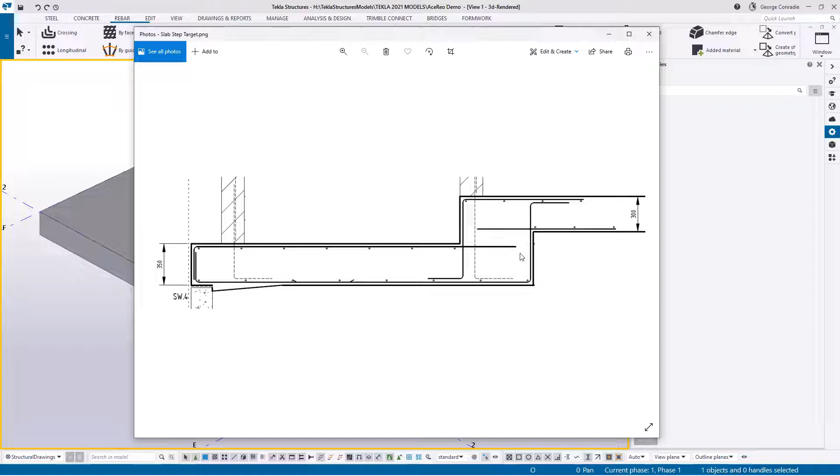Now, if you look at this, you'll see that the rebar just sort of ends here. And this is typical of a slab that's post-tensioned. So in this area and further beyond, there most likely won't be any reinforcement apart from reinforcement over columns and perimeter reinforcement, because the post-tensioning will deal with the rest. But this is a very typical slab arrangement in Australia. So let's see how we detail this arrangement.

Also in the model, you'll see that I've got two examples here. They are modeled differently in terms of concrete. This is typically what we find with IFC imports, where you have a slab modeled in the bottom, you've got a slab on the top, and they've joined the two together with a full depth slab to stitch them together. So there's an overlap here and there's an overlap there, and we'll just see how we deal with that. This one, however, has got a slab in the bottom, a slab in the top, and it's stitched together with just a small little piece of insert, so there's no overlapping on this one.

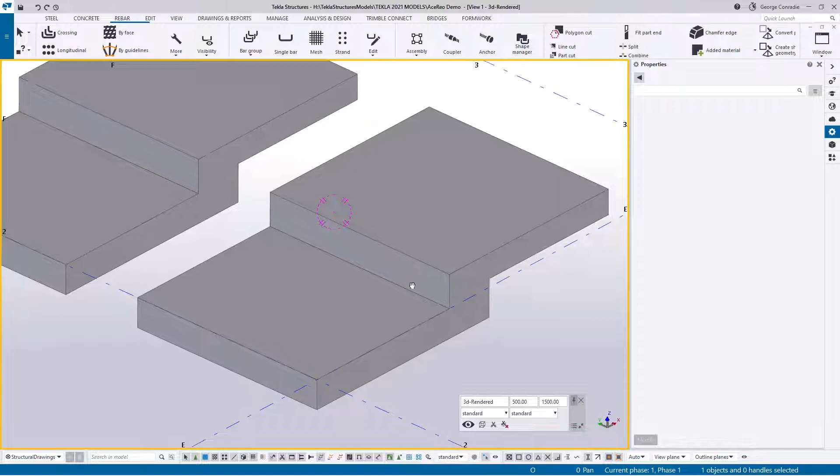Pretty much the same outcome in terms of reinforcement, but I'm going to use this one to show an alternative to Z bars where you have full reinforcement on the slab. Let's just start out. I'll go transparency mode, I'll go Control P, and I'm going to isolate this so we don't see the other one. So if I select that, right click, select in selected view, so we'll only see this one now.

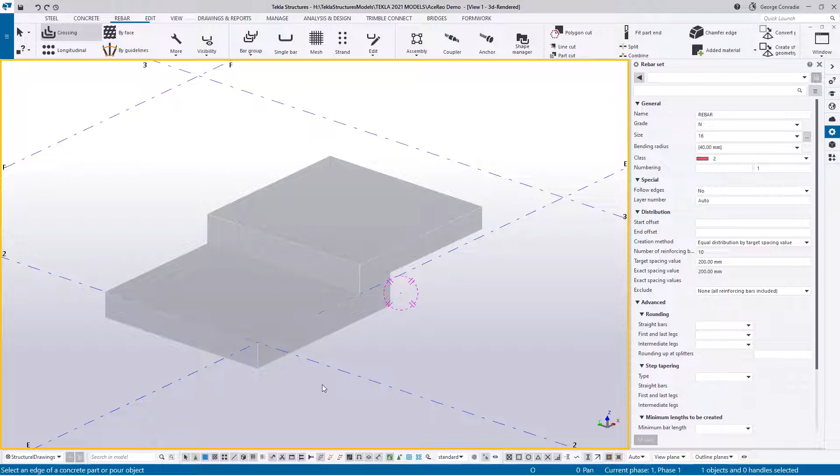And then as tradition has it, we've got 16s at 200, so I'll go and select my 16 mains. I'll keep my main layer reinforcement, I'll keep red, and then for the offsets nothing, and for the target spacing 200, all of that is okay. And then I'll hover over this part of the slab, and instead of selecting all of it, I'm just going to select the front part and the bottom part for the rebar, and I'm going to say okay.

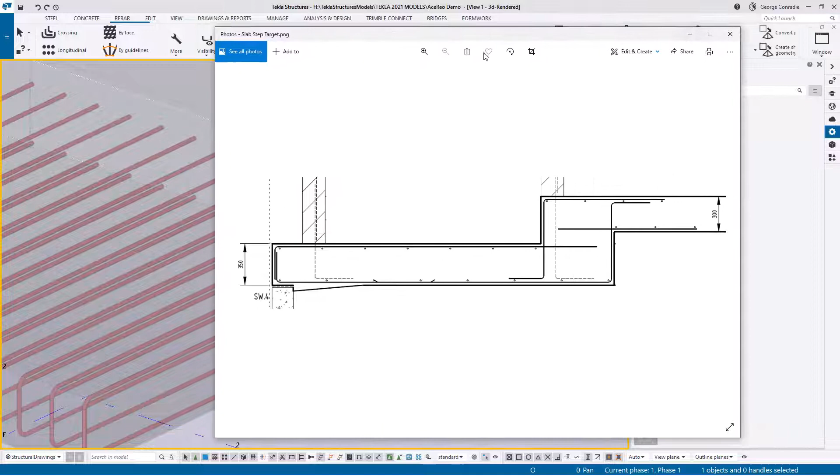Now, before we move on to the top part, we're going to finish off this bar. If I just drag my view in here, we want to deal with this bottom bar. So it's got a hook at this end coming around here. It's split, it's got a splitter here, and the reason why they put a splitter here is just to give the guy some adjustment on site. If you have a snug fit there and somehow the formwork or the dimensions on site change, and you've scheduled it without giving a bit of grace here in terms of a lap, they might run into problems.

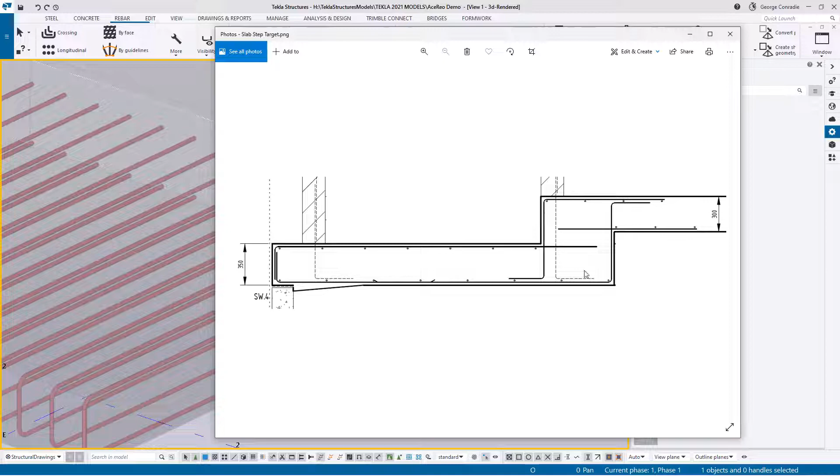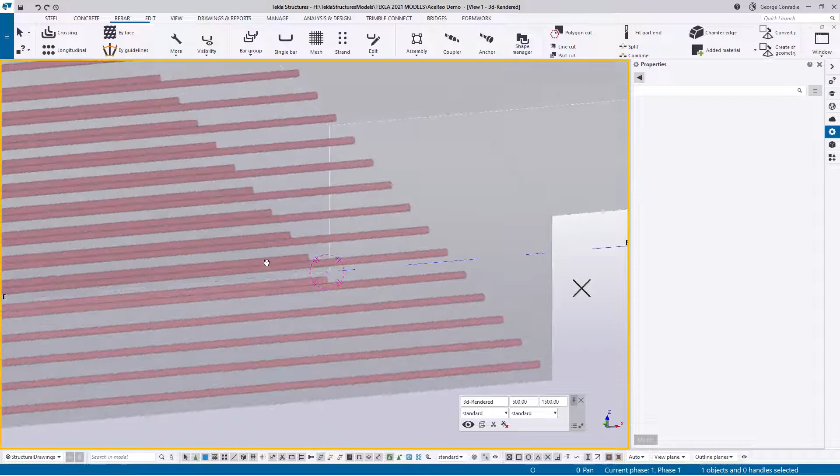And then this one that's split goes up all the way. It's one bar to the top of another slab. So let's do that first. The first thing I'm going to do is make sure that my leg visibilities are on. And then I'm going to click on the top part, hover over this edge and just drag that down. The reason why I'm dragging it down to the concrete is that once we have that at the concrete's edge, we've got control of how much we want to insert.

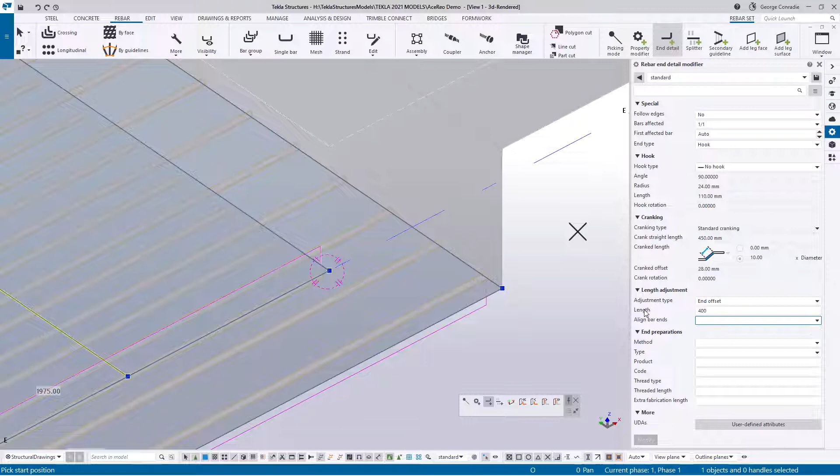Now there's two ways. Click on this, extend that by the exact amount you want, but then if that changes, you have to come back and stretch again. Or the way that I prefer to do it is I select the bar, go up to our end detail, make sure that we've loaded any defaults. Then for the hook type, I select no hook. And for the adjustment type, I'll say give us an offset, and the offset we want is 400 millimeters. Now, if we hover over this end, we can see we have an extension of exactly 400. Should this now change, we don't have to fiddle with the face.

All we have to do is just click the modifier, and we can change anything here. We can even introduce hooks or whatever we want in here. We can also affect every second. There's a lot of stuff we can do with that, but I think that's the better way of detailing if you want to cater for change management.

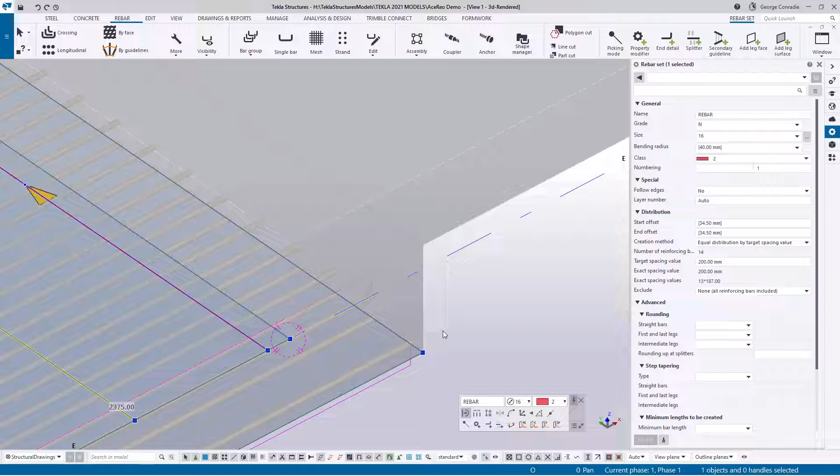The next thing we're going to deal with is this bar. Now, according to our sketch, this bar should go up this wall and up to the top of that slab. So the quick way of doing this is you can say add a leg and then swing around and add this face and then do all kinds of stuff. But the quick way to do it is you click on this bar, you hold in your control key, you select that leg and you drag it up.

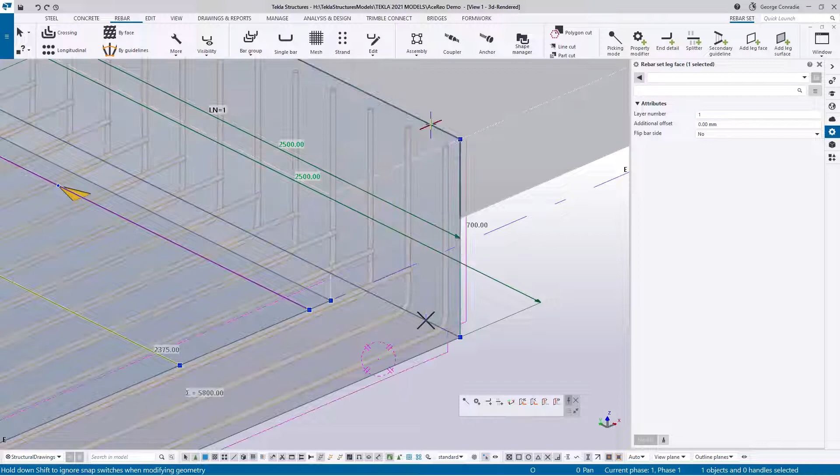If you control drag up and we drag up to 750, because that's the difference between the two, it creates a leg instantly for you. And now you can repeat that process again. You can just hold in your control key, click on that face and then drag it, say for instance 900 mils. And just like that, we've now created that Z bar that the sketch showed.

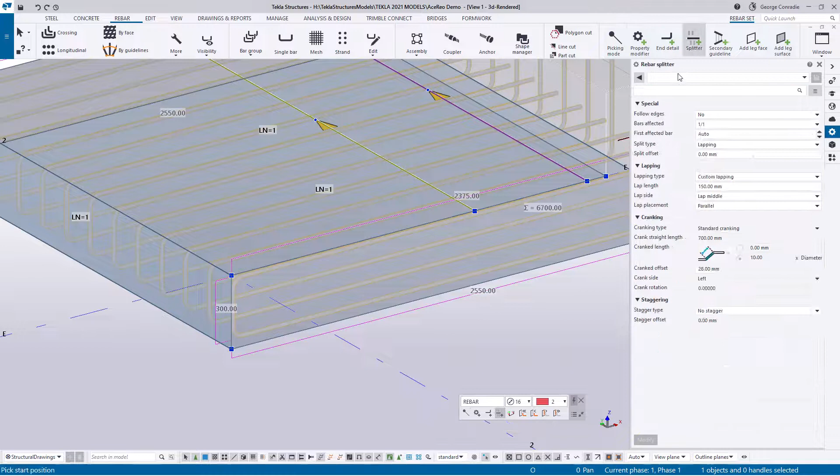Now the first thing we need to do is we need to split these bars here because they've got a hook on the top and a hook at the bottom. Let's just have a look at our sketch. So it's these little hooks here. So let's deal with that first. So if we click on this bar and we say give us a splitter, and I'll just load my defaults, see what happens, and I go in the middle of this face and I split it.

You see how everything wraps around, and what it's trying to do is build up 350 millimeters each side, because when you click on this, we have a 700 lap divided by 2 is 350. That's not what we want. What we want is a custom lap, and I'm just going to chuck in there 100 millimeters. And now if we look at that and we see these values popping up on the screen, it's 200. That's a typical 200 lap that you would expect in a 16 millimeter bar.

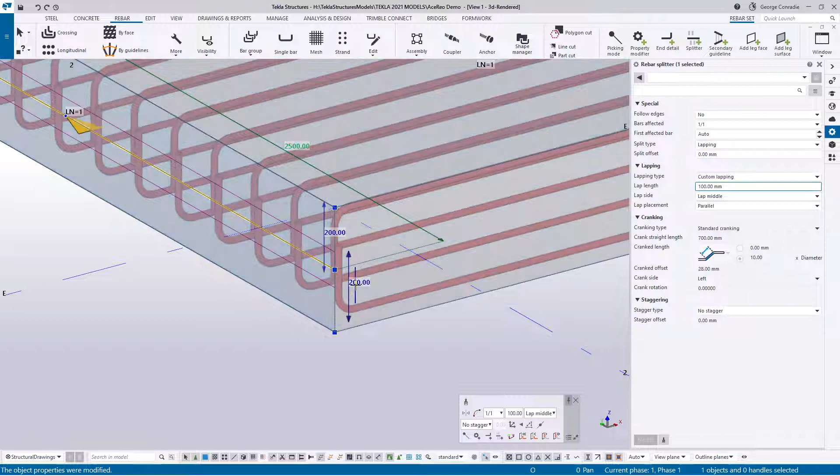Where does the 200 come from? Well, a 16 bar's actual diameter is 19, and a typical hook standard would be 10 times the bar diameter of 19, which is 190 millimeters. So we round it up to 200 mils. So that's really what we want to achieve. So instead of having a splitter to lap something, we have a splitter to generate a hook.

Now, this is just a quick way of doing it, and the reason why I do it like that is we don't have to deal with clashes. In the form of a splitter, Tekla's just taking care of that for us. And now we can move on. The next thing that the sketch wants is there's a splitter down the bottom here to separate this little L bar from this little Z bar, or big Z bar, long Z bar.

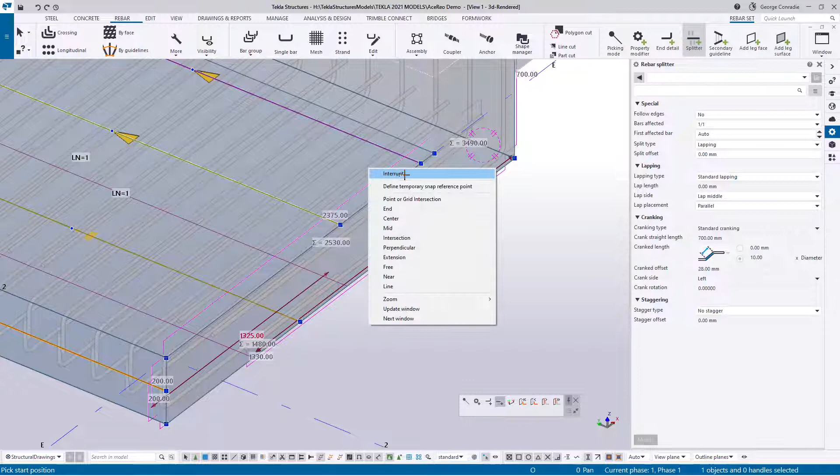So what we can do is click at it once again, go to the splitter. This time we have to reset our settings. So we load our standard, so we're back to a standard bar. Now normally these dimensions will be indicated on an engineer drawing for you, but I'm just going to wing it. I'm just going to say 1000 millimeter. And once I do that, maybe what I'll do is I'll just go group bars so we can just get a better picture.

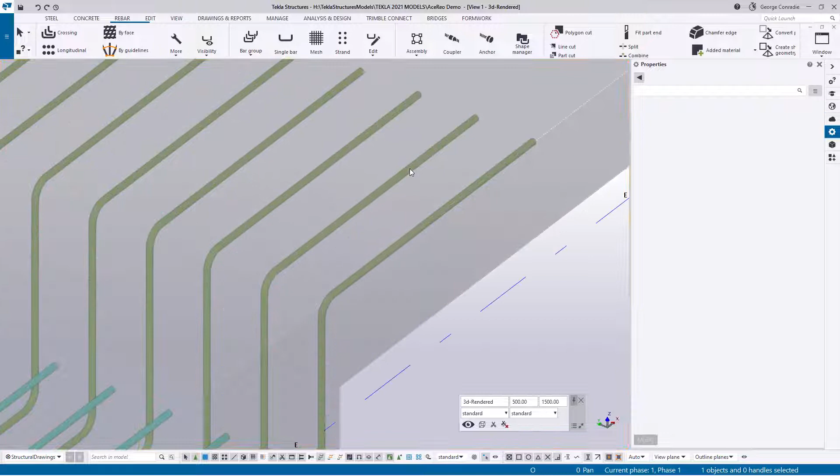Now we have this blue bar that wraps around, that's the 1L. We've got this cyan bar on the top that extends into the beam. And then the third one, this green bar, is now the Z bar we want. Now, if I click on this bar, we can see that the length of this leg, although we stretched it 900 millimeters, it's giving us a leg of 944. The reason for that is because of the cover. You can see it's extending to the back of this.

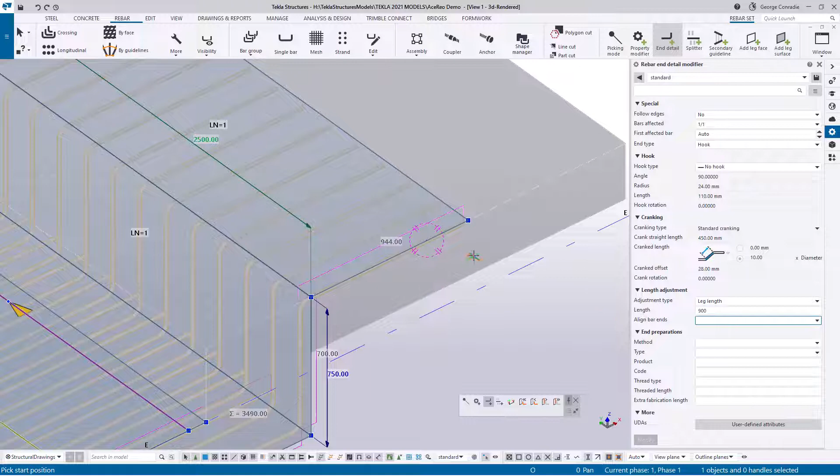And if we want that leg to be exactly 900, which is what I want, then what we can do is go over to the end detail modifier, reset our standards, and then for the hook type, again, we're going to say we don't want a hook. But for the adjustment type, we're going to say we want the leg length, and the leg length we want is 900. And once we do this and hover over that, Tekla then fixes that to a 900 leg. So you can see we've got a 900 leg there, and that bar is exactly as intended now.

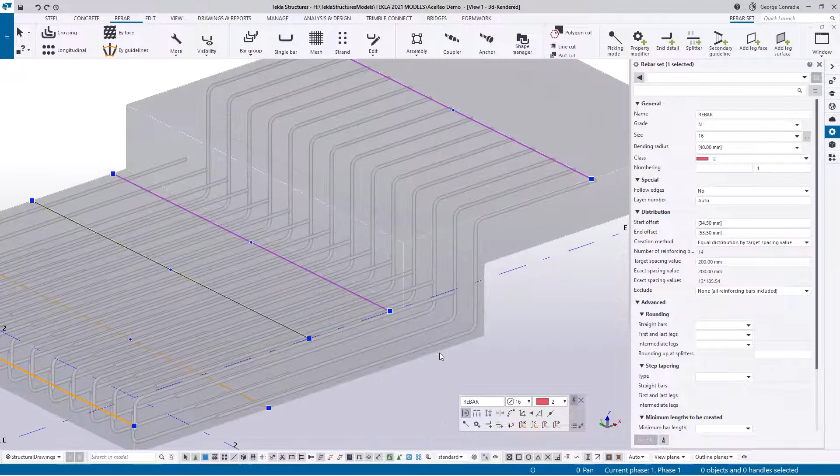So we've pretty much dealt with all of that in one set. If I click on that, that's still one set of bars, and I'll switch off the visibility so it's a bit more clear what's going on. If we look at that now and click on that bar, that's one set. So we've managed to get 3 bars: the L on top, the L at the bottom, and then there's a long Z out of one set. And we didn't have to worry about spacing.

So what I'm going to do now is go Control P to see a plan. Then on the top, I'm going to click on the spacing bar and say Modify Settings, just to see what we've got here. Now we've got our minimum calculated cover there, and we've got the maximum amount of bars fit in. So what I'm going to do is change it.

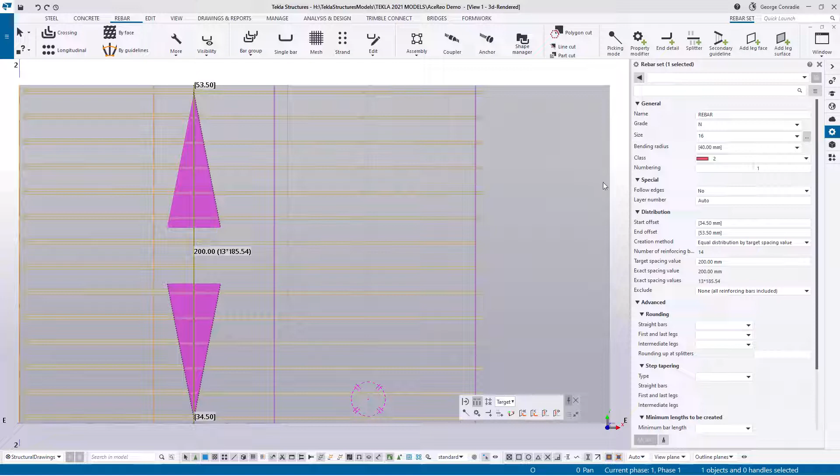I'm going to say I want an offset of 50 at the bottom, and I also want an offset of 50 on the top. Once I do that, oh, that's very coincidental, but it's very nice for us. Tekla has now come up with 12 spaces at 200, which is 13 bars exactly.

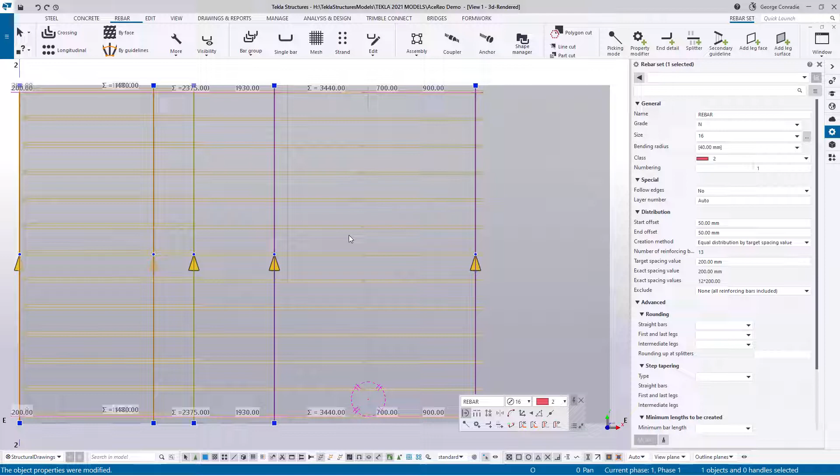Now, the reason why I always do that, and I know I repeat myself in these videos, but it's very important. Once you arrive at the drawing, you're not going to wonder why you get strange target spacings. These spacings are exact, and it's always better to give them a bit of grace off the cover. You don't have to go all the way down to the cover, the cover is a minimum setting, not a maximum. So when the bars in the other direction fold around, you don't have to worry about whether they'll interfere with the rounding of the bar. So it's good practice to do this.

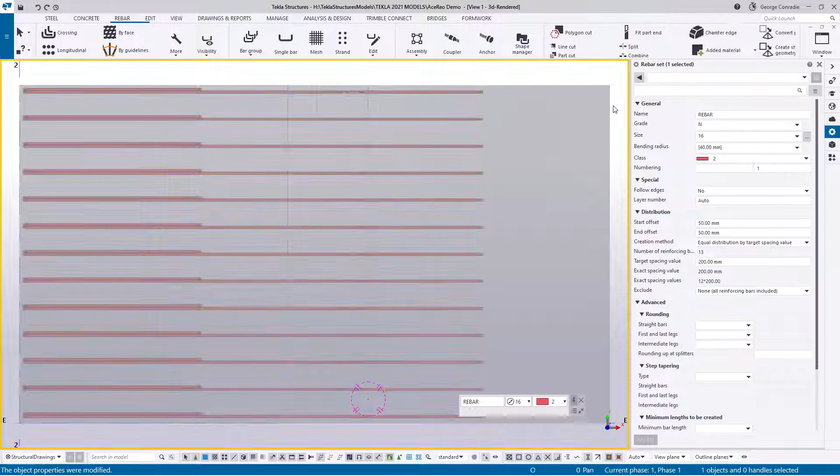So the next thing we want to do is deal with the other bars. If I just go into 3D again, let's have a look at the sketch. I think the next thing we need to do is just deal with this little straight bar here at the bottom. Now, there are a lot of ways to deal with this.

The easiest way I would imagine is to go Control P and then hit this by surface or by face, and we still have the same settings here. Then what we need to do is work on the bottom of the slab, so we want to work on the far face, and then we'll see what comes up here.

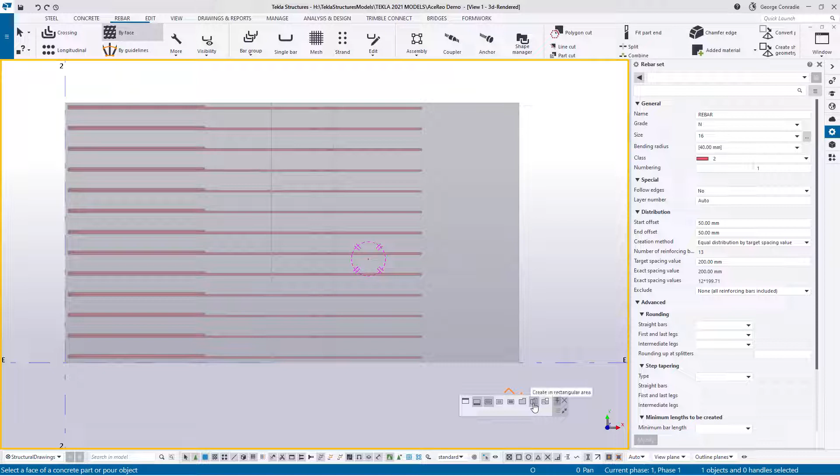But what I also want to do is work with a rectangular area. If we pick this bottom corner and pull it across to there somewhere, we can see the direction of the Cyan line, so that's the wrong orientation. So what we do is click this one, and now if we go here, we've got the right orientation.

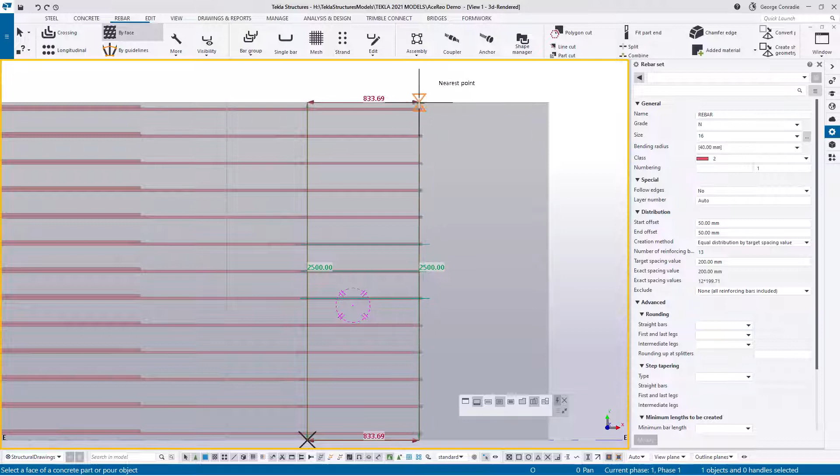Now in terms of the size, if you get funny dimensions, you can hold your shift key and just start panning. You'll see that it will eventually get you the dimension you want. In this case, we can just deal with it, and if it doesn't accept, like there I clicked, oh, and it did accept it because exactly, oh yeah, it's exactly under the other because we accept the same dimension.

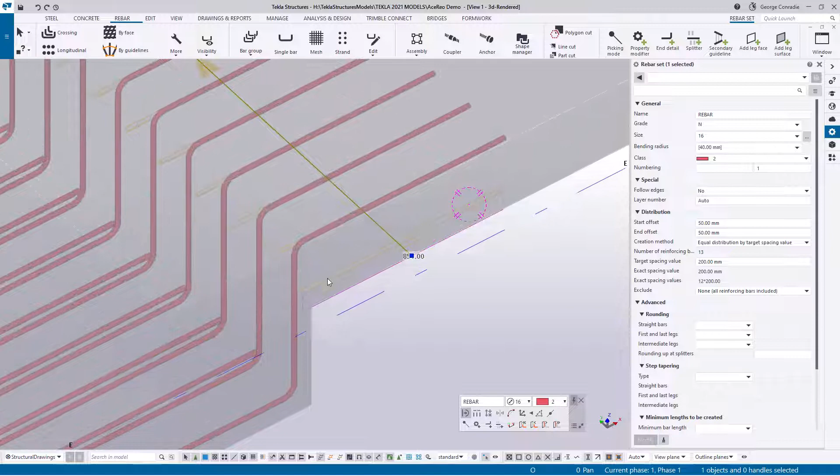So once we've got that clicked and in place, if we just look at the leg face again, we can see it ended at the concrete. So now we're going to control the amount of projection into the beam with an end modifier, and this time it's no hook, and the length is not a length, it's an offset, and we're going to be offsetting this 400 like we did before. Then if I click over here, that will extend it into the beam for us.

Now if we just click on that and look at the bar length, it's not lighting up at the moment, but we can always do an inquiry. You can see it's 1250, and well, actually it says it there. So I think in this regard it actually works out quite well. I think we've been a bit lucky there.

So if I go into Control P mode and click on that bar we've just put in, it's obviously clashing at this intersection. So there's a really quick fix for this.

Now remember these bars, if I just click on those again, these bars happen to be 12 at 200 exactly, and the target spacing of 200, 50, 50. So that worked out nice.

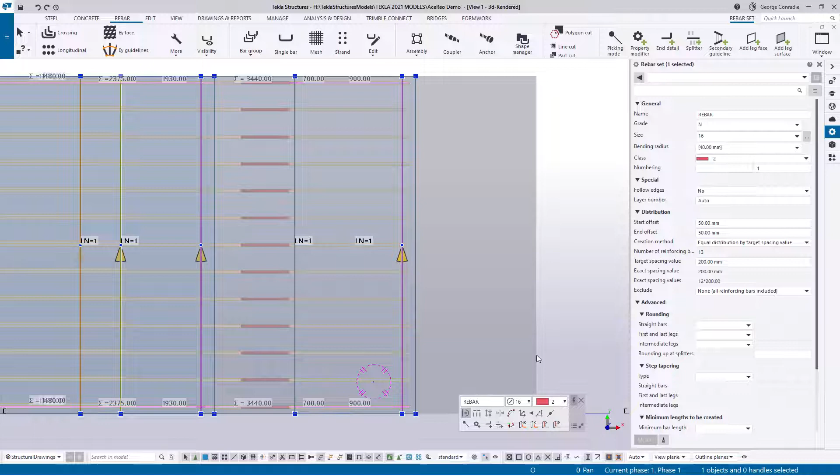So to fix these up, first we know that from the center to the end is 50 millimeters, so we need to move this bar one on. 50 plus 19 gives us 69. We need to look at the direction, the direction arrow is here, so this is the start. So we want to change the start to 69.

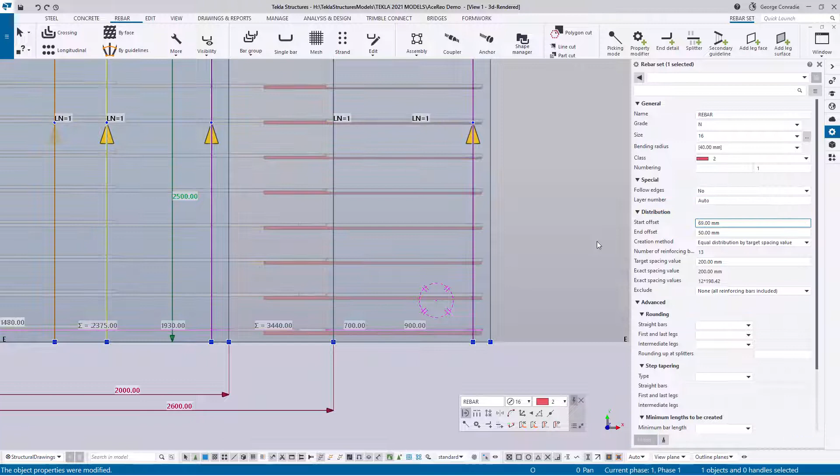As soon as we do that, we can see I moved the wrong bar. So let's just undo that and pick the right bar and do the start at 69. That moves the bar exactly off edge.

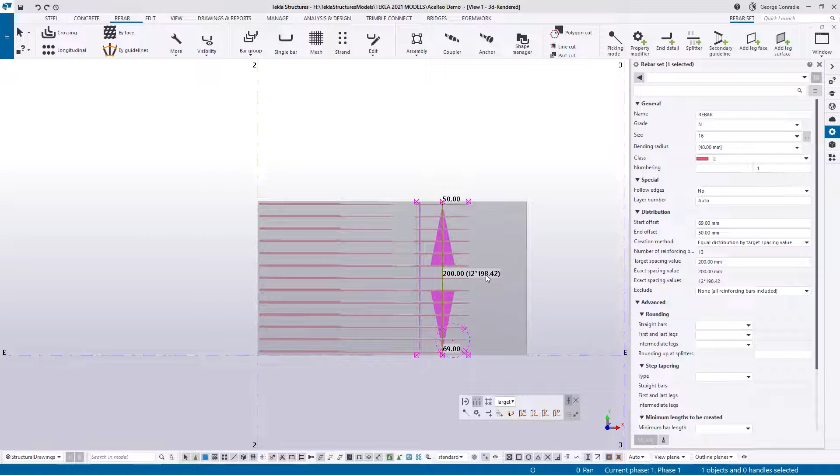Now if I click on the control line here and show the dimensions, you'll see we've got 69 here, but we end up with a bad dimension there again. So we can just say give us a flexible last space, modify, and that will fix that up. Then all we need to do is at this end here also add the 69 to the end.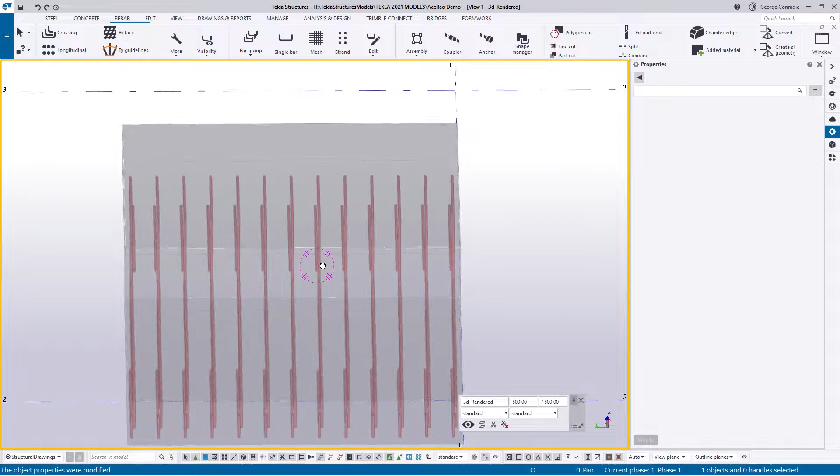And just like that, we now have a clash-free crossing there. Your drawings will be good because all these bars will be at 200 millimeters spacing except for the last bay.

Now that we've got that, the last bar we need to look at is this Z bar over here. The way I'm going to do this is I'll use, well, we can use bar by face or crossing bar. I think let's use the crossing bar for this.

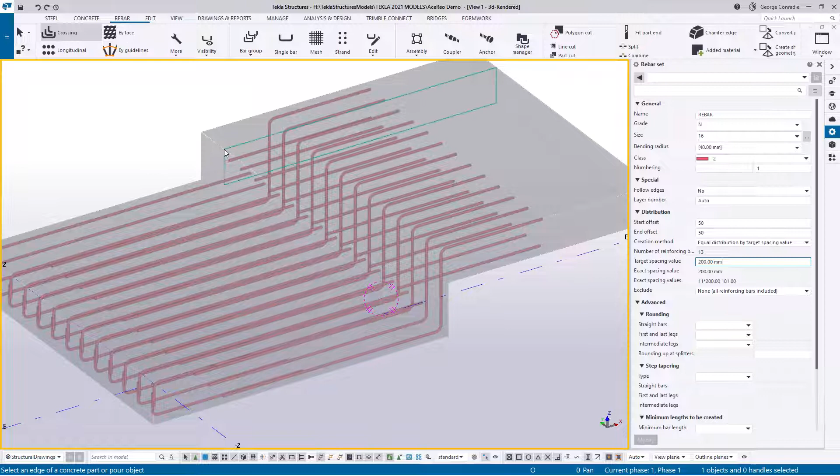What I'm going to do here is go back to our 50, and everything else remains the same. I'll also just go target 200. What I'll do is hover over this, but only select this vertical face here, and then say okay. So we get these little stubbies at the end here.

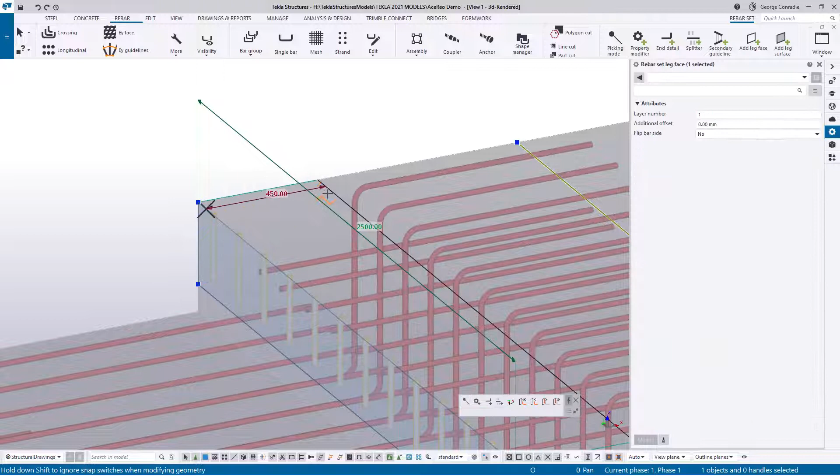So the quick fix to turn that into a Z again is if you click on this bar, we get our face. Then again, holding your control key, click and drag this, and let's call it 900 mils. That'll give us a leg on the top here.

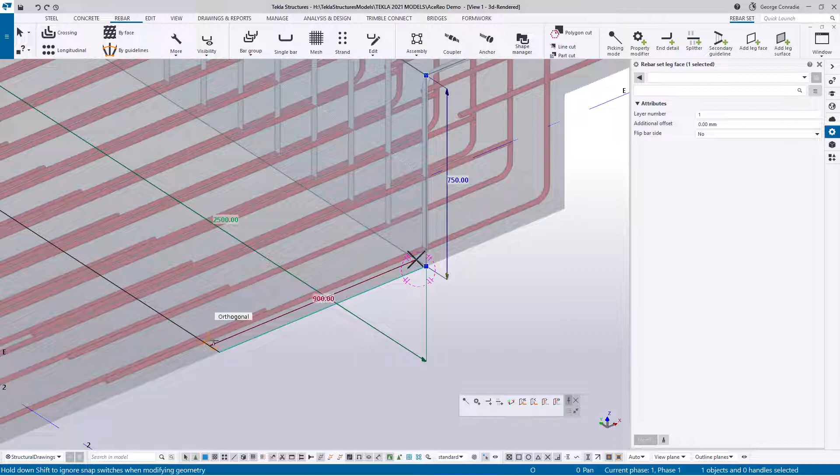This bottom one, if we hover over the edge here, we can take this arrow that will keep it ortho to the bottom, and that extends that. Then once we're at the bottom again, we can take our control key and drag this leg to 900. And just like that, we've now created a Z bar in place.

So what we need to do now is just look at the spacing and the leg lengths. I'll click on this bar to make sure we've got the right bar selected. I'll switch off my visibility, then go Control P to see it from the top, and we can look at our leg spaces quickly.

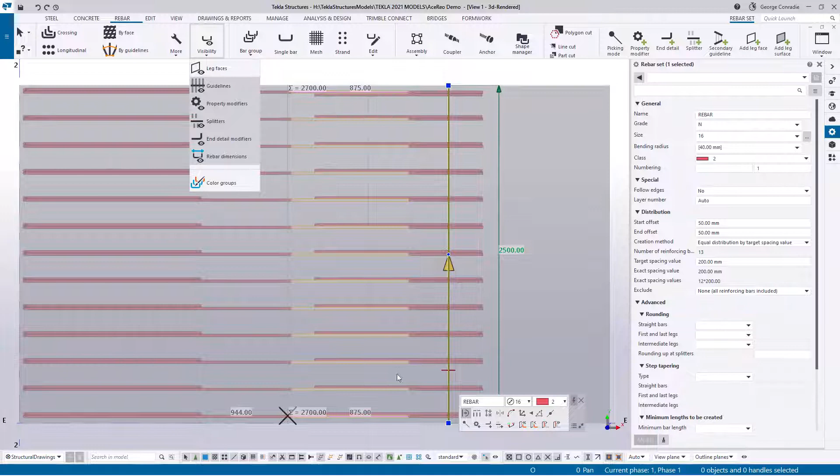So this bar needs to move, it's clashing. Let's just see where it's clashing - it's obviously clashing with that one, so it can move one across and it's going to miss that one. So if we move this bar one across we should be good. One across means 69 to this value, so that moves it across.

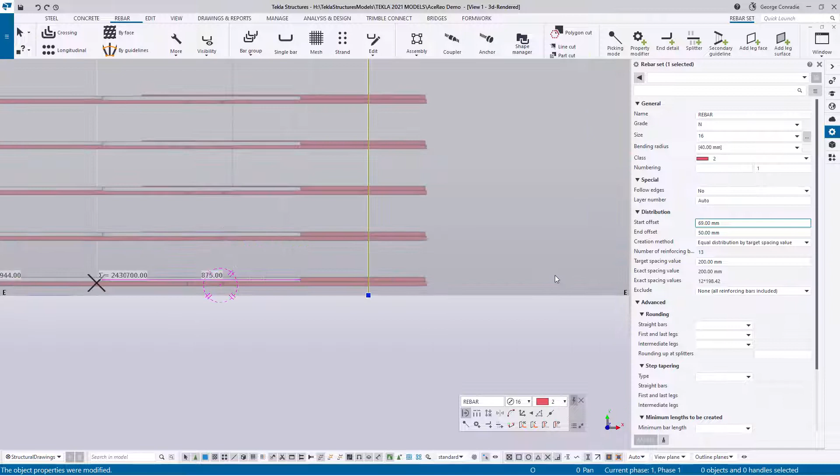In terms of the spacing, you can see here from 12 at 198, the spacing is a bit crooked again. So if we click that and say give us a flexible last space, modify, that fixes up all the spacing for us. Now the last bar, you can see we've got that clashing again, so all we do is increase the cover there to 69. That should be it.

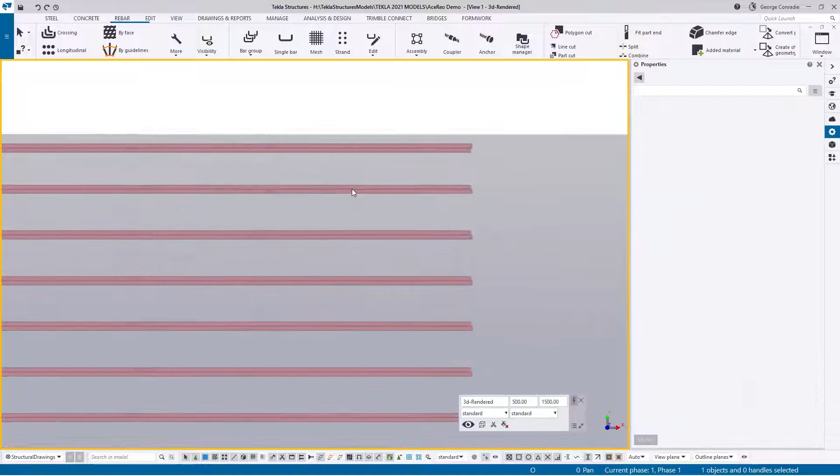Let me just see if I can rotate here. There we go. That should now have all the bars in the main direction clash free, working with each other, and we've got our Z.

Now the only thing we need to do is we've got a problem here, you can see there. So first we're just going to deal with the legs of these bars. For this one, in the bottom it only needs a leg to stand on, so we can say give us a leg length this time, a leg length of say 600, and no hook. Then if you hover over that bar, it will pull it back.

So you can see we've now dealt with that problem. And on the top, the leg can be the same as with the other bar, which is 900.

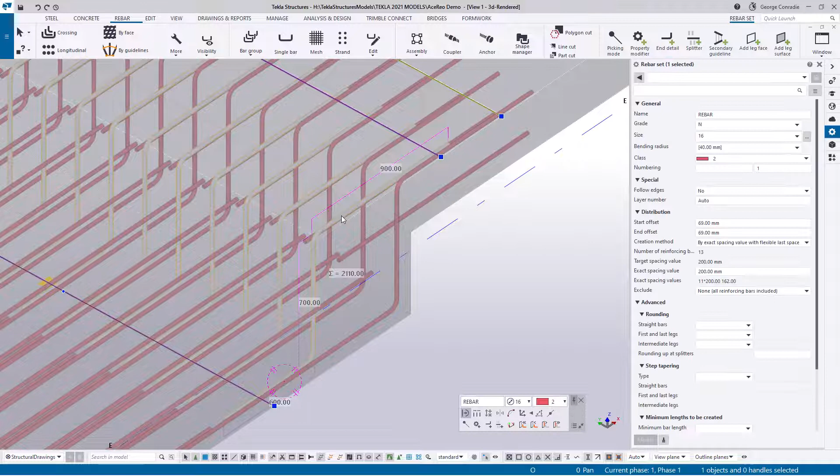So again, in modifier, we want a leg length, and this time 900. We can just hover over this edge, and that turns that Z into a 900 by 600 by whatever the vertical is, which is 700. If we go inquire, we can see 900, 700, 600, beautiful dimensions, and also clash free at this stage.

So the only thing that we need to do to finish this up is our distribution. Now that's the easiest part of the lot. So if we go longitudinal, and we'll pick a different color for this, green, and I'll get rid of the offset so Tekla doesn't auto calc. We'll go at target spacing, and let's make this, because the distribution is still just 300, make them a bit bigger.

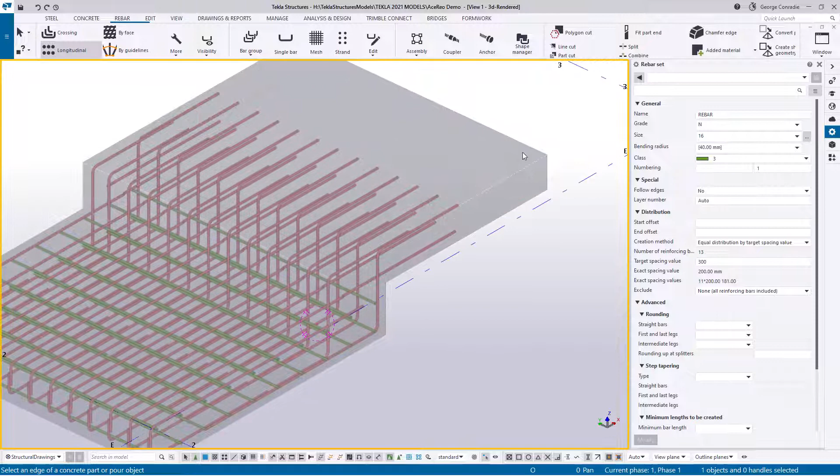And then what we'll do is we'll hover over this edge, and then we'll pick the bottom, but we'll also pick the top, and that takes care of that. And at this one, what we can do is we can pick the top and the bottom as well, and we'll have to trim those down a little bit.

And we can say, oh, let's do this one differently. I'll escape there, I'll show you a different way to do it. But let's just look at what we've put in here. We can see that's worked out quite nicely, except for the top. It's going too far, that bar is loose.

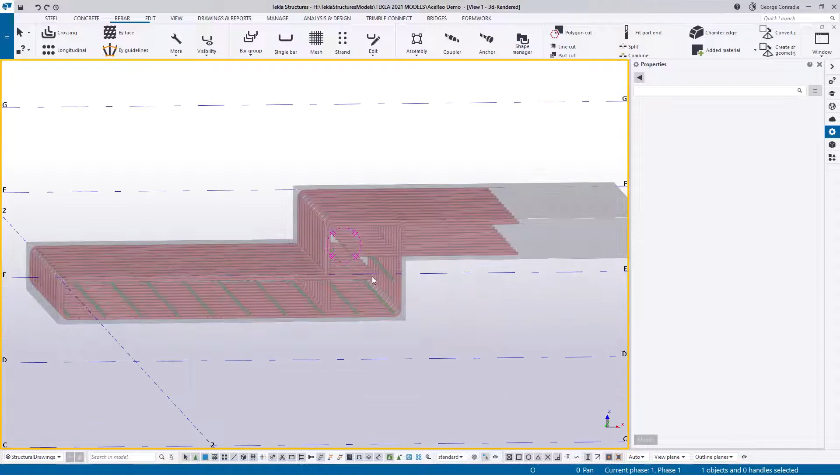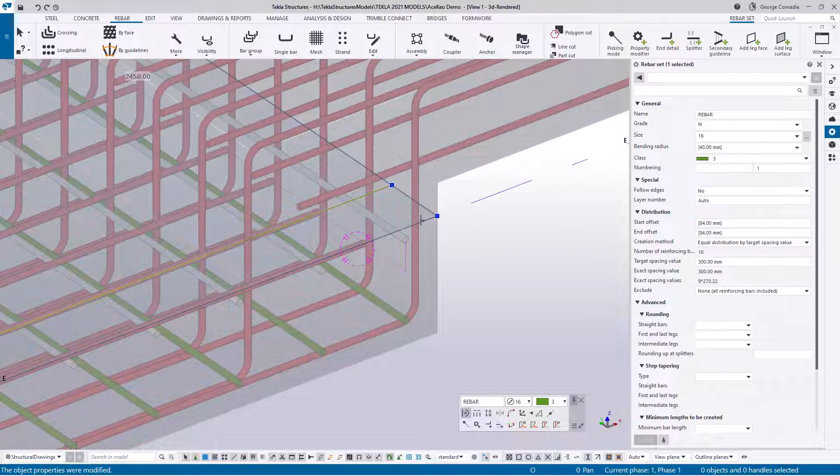So there's two things you can do here. The one thing is you can click on this bar and say omit the last bar, and that problem goes away. The other option, if you don't do that, is to switch on your leg visibility again, and then bring this leg back to the end of this bar, and that gives you the same sort of result.

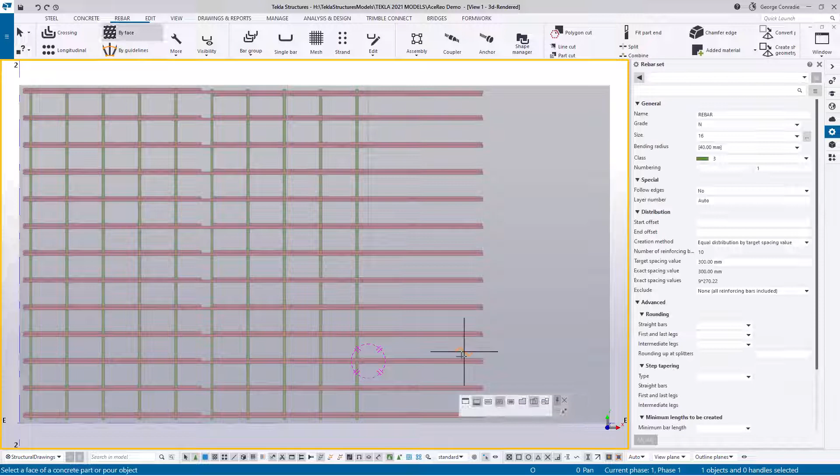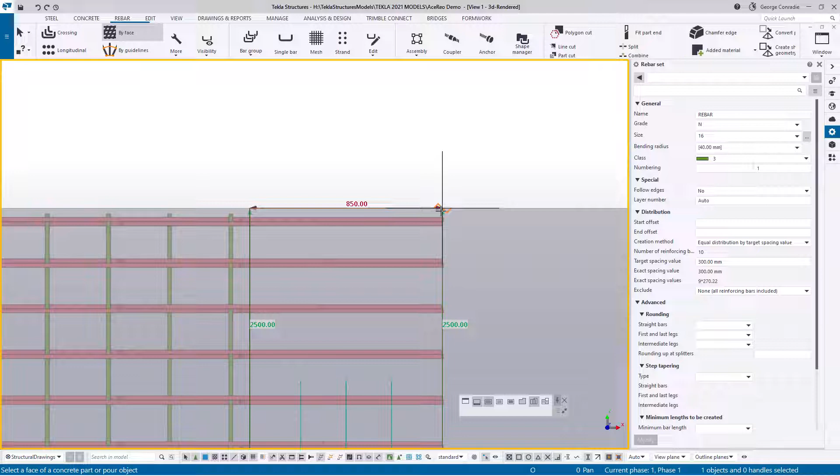So what we can do with this is, again, if we go Control P, we can go to our face, and again we deal with the far face or the bottom of the beam, and we're dealing with a rectangular area, and then we can pick the inside of the beam, which is that side there, and we can look at our orientation, we can flick it. That's the correct way. And then what we can do is just pick our 850 again as before, and just like that, we've now got those bars in, and they should be at the right level and the right thing. Now the only thing is that that's sitting right in the center there.

So if we click that bar, we can just go to the end and say give us a 25mm cover, and that pushes that in. So that's exactly what we need there.

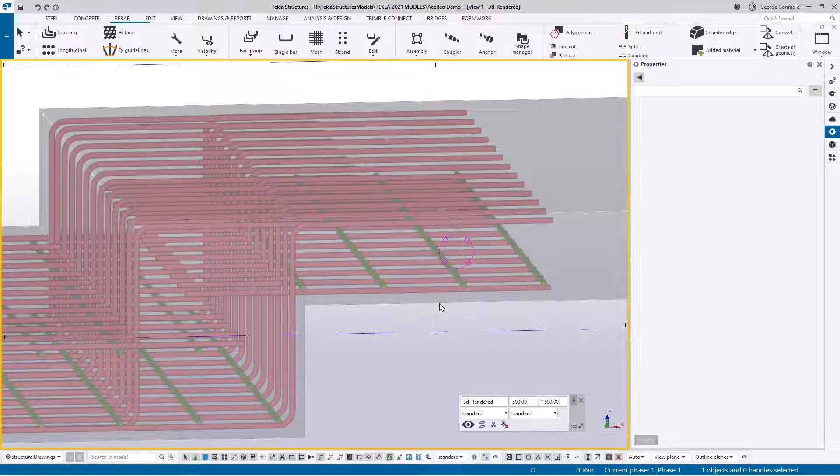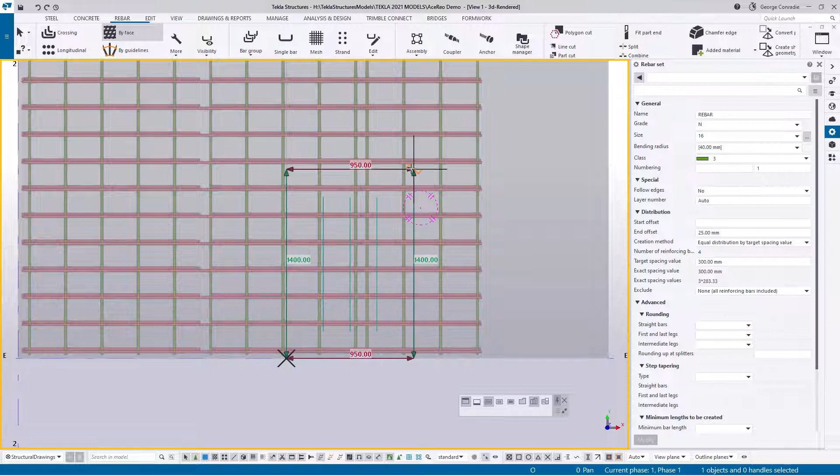Now we can do the same on the top. We can do exactly the same on the top, I think. So if we go face, and again Control P, and we go near face this time, and we will pick this side of the beam, like so, and we can go across to that point there, and you'll see there's a snappy point there, and it gives us that. So that should go perfectly in the top, and that deals with it.

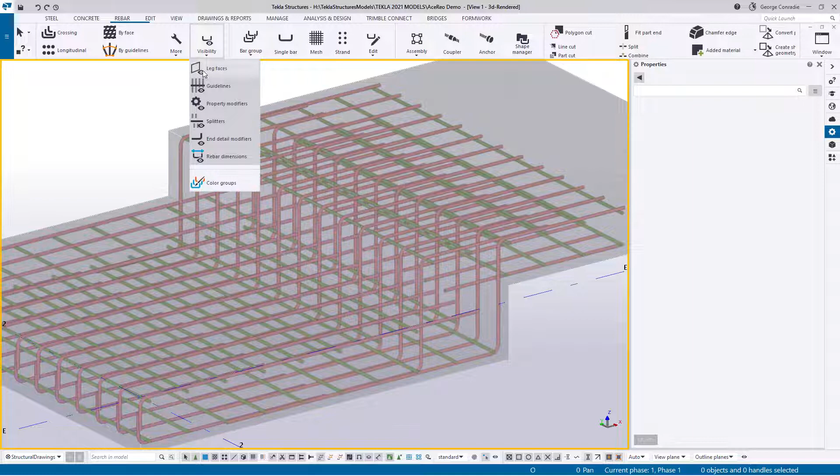Now if we look at this, let me just see if we get a better view with groups on. Not really, so switch the groups off, leg visibility off. If we look at this in our elevation, and I'll just isolate this. We first just select something and then right click and say fit in selected views.

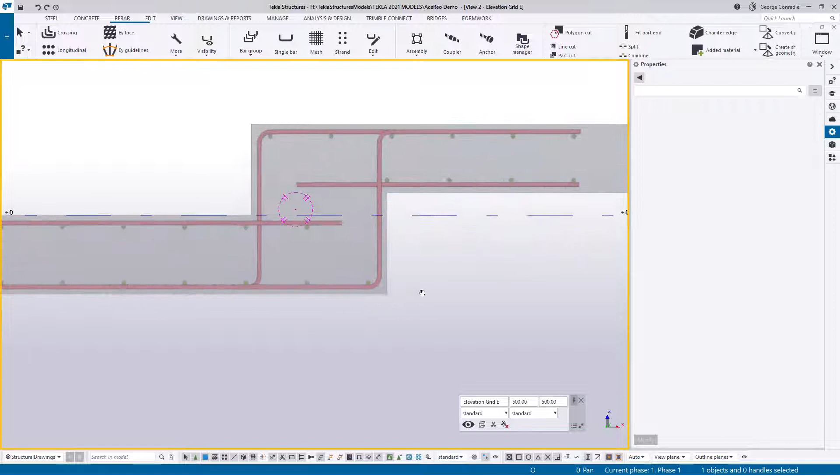If we look at that, we can see we've now pretty much achieved what we needed to achieve in the sketch. We've pretty much got this Z bar done on the inside. We've got the one on the back. We've got this little short bar here with only distribution in that area, and then we have the L on top and the L at the bottom.

So there's our long Z that goes up to a point here. If I just zoom in, there's a little line, and then we have our short L that comes up here. We've got another L on the top. We've got our separate Z on that side, and we've got our green distribution bars.

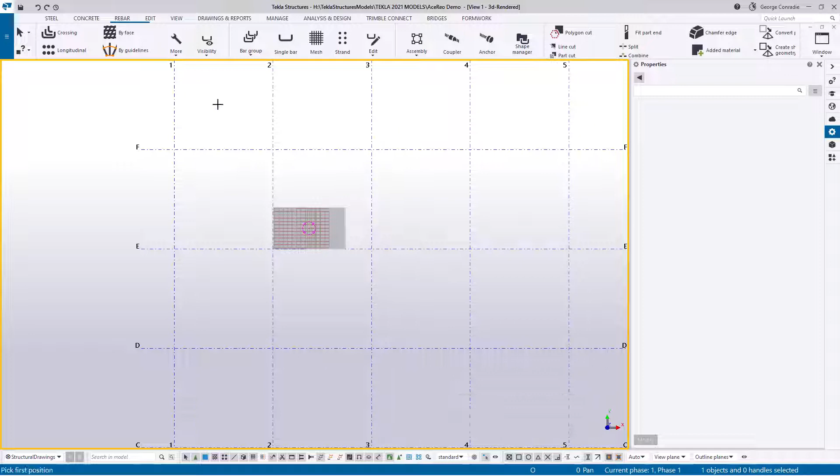Okay, so having done that, let's see how we can do the other one. So what I'll do here is I'll just go W2 and create a bigger workspace here so I can see the other slab.

And then what I'll do is I'll grab this slab, right click and say fit in selected view so we can isolate that one. Great. Okay, now let's look at this one quickly. So this one I'm going to do differently. I'm going to pretend that this little piece is a conventional slab, so it's fully reinforced.

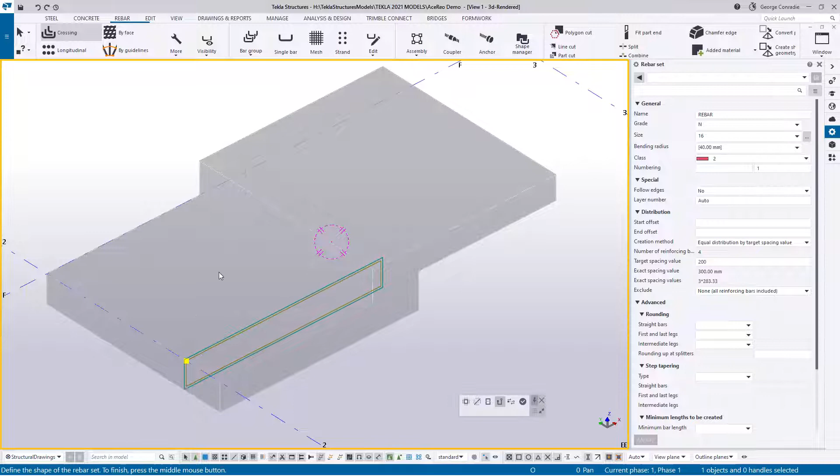So the quick way to do that is crossing bars, N16s. Red is our major, our outer layer, and we'll get rid of the offsets. And our target again will be 200 in this direction. And then if we hover over this side, we can pick all of them and say OK. We can do the same on this side and say OK. So now we've got those two slabs there.

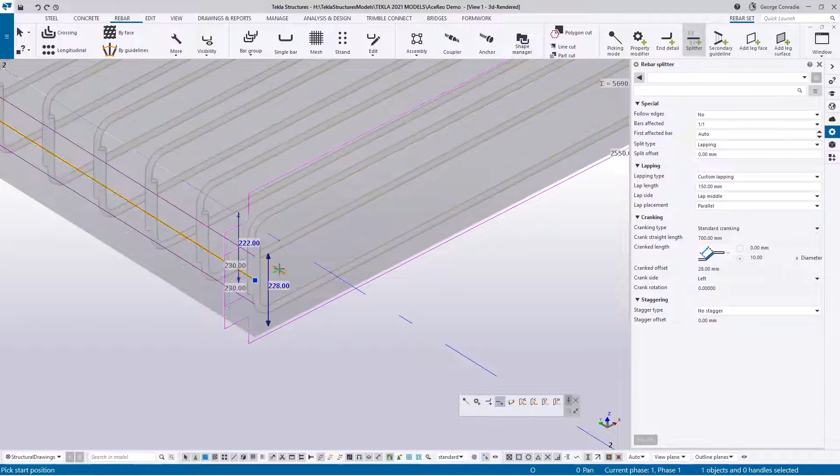Now the first thing we need to do with these two is to split them so they can become L bars. So again, we'll click on that and we'll go splitter. And from previous, we know that we need to do a custom. And previously we used 150 mils with this one. So let's see if that works for us. So if I click there, we can look at the leg. It's not quite right. We want a 200 leg.

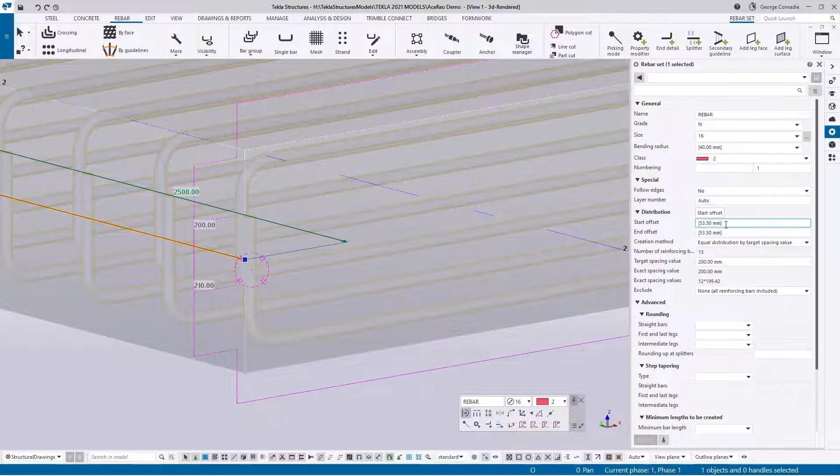If I just click on the bar, you'll see that that's 230. So if we decrease this to 100 mils, that gives us 203. No, it's 200 and 210. That's really odd, unless I didn't put that exactly in the center. Let's just try that again. If I click on this and say, give me a splitter, and it's 100 mils, that gives me 200 and 210.

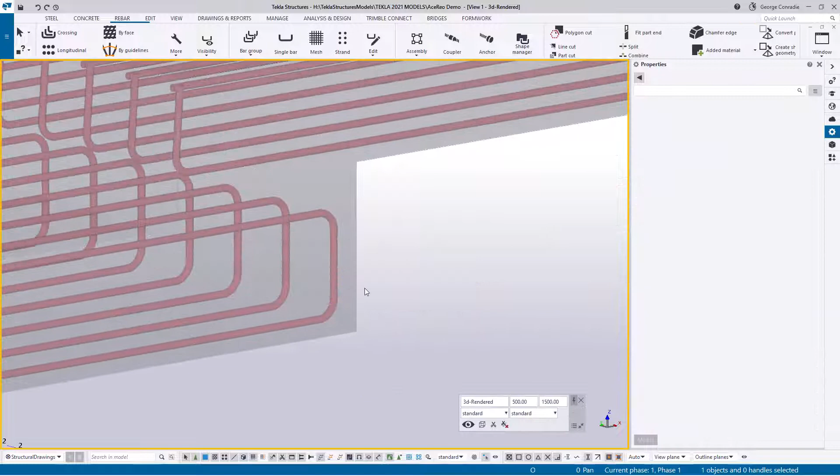Well, it's close enough, I think, but you can play with the figures there. I mean, 210 mils. No idea why it's coming up with that. But anyway, let's have a look at that. And that side, it's 200. That's really, really interesting. So let me see if we delete this one, and we know that one works.

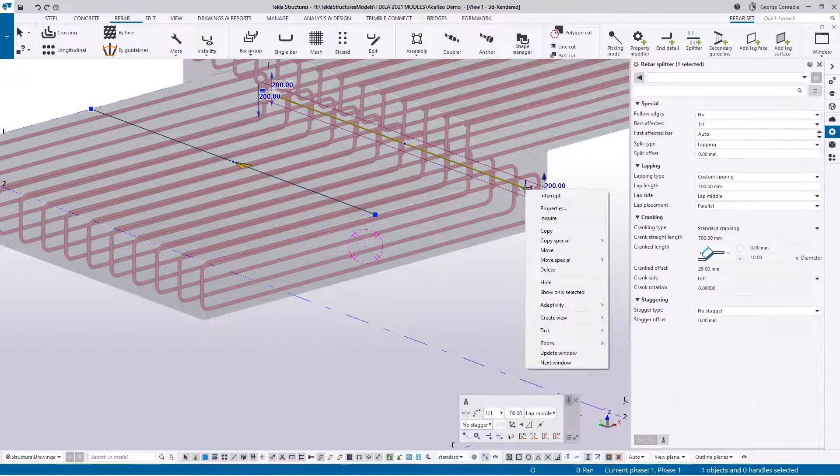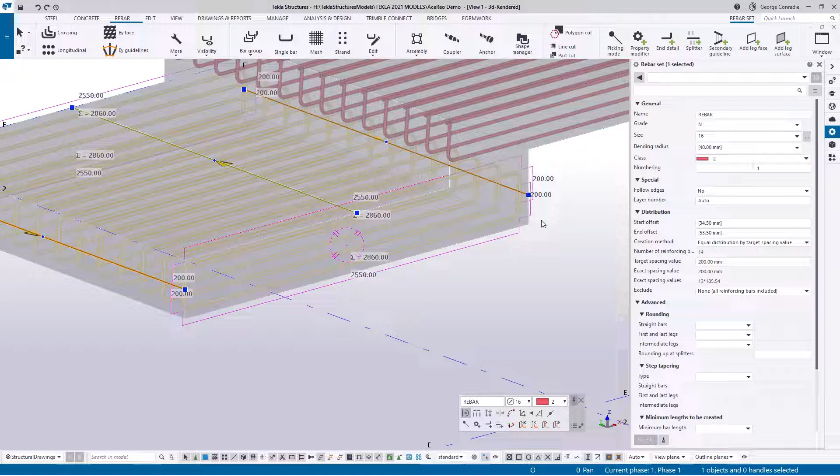If we take this one and say right click, copy linear, and we copy it from this side to this side and say copy, it's reproduced it on this end. And now if we click on the bar, we get 200, 200. So it's quite strange. It might have been just the position I snapped, that I didn't quite get it in the center. But as you can see there, the aim is 200 legs, and we have achieved that with a single bar.

On this side, we've got a shallower slab. So let's just split it to start out with and see what we get. So we get a really odd dimension there. So if we go here, we will have to increase that to 125 or maybe 150 because we're on 187. So if we go 150 here, there we go. We've got our 200 legs. So if we click here, we've got our 200 legs.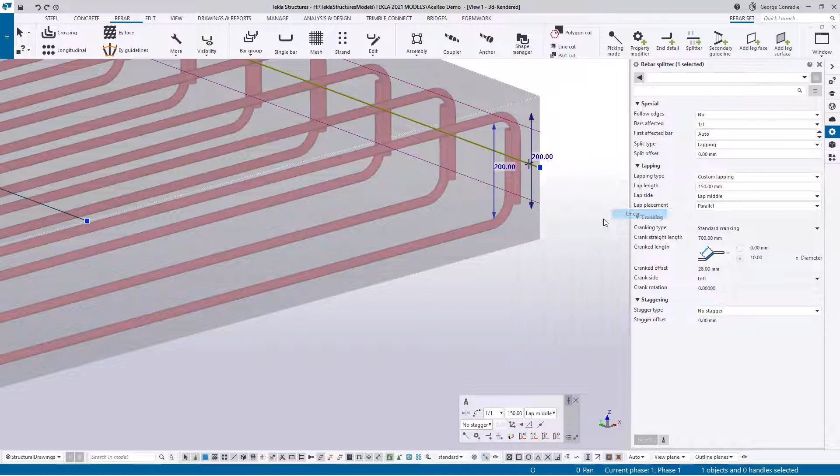So if we then take this one and just replicate it, copy linear, you have to make sure it clicks, and we replicate it on this side, say copy. Now we've got our hooked bars done with single inputs, so we don't have to worry whether they match or not. Tekla has taken care of that in the set, but we managed to turn those into L bars. And now we need to put in the Z bars.

Now, I'm gonna show you a manual way and another way to do it. And we'll use the point command for this. And make sure you pick your linear. And then we'll stick to a 16, but I'm going to make it a different color. Let's make it purple. And then the offsets, let's just stick to the 50 we've got. Distribution is 200.

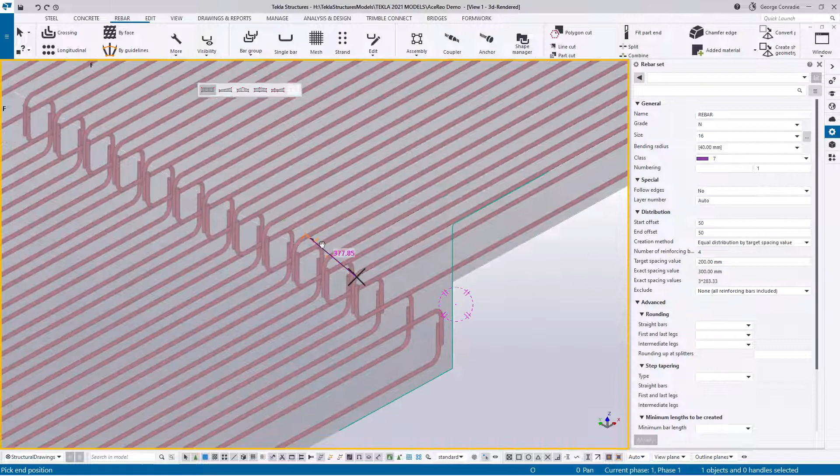Now, what I'm going to do is just pick any arbitrary length down the bottom here, and then go all the way up to the top of the slab, and then pick an arbitrary distance over here, and then middle mouse to pick the bar. And then for the spacing line, we can pick this corner over to the other corner. Now that will generate a bar for us with random leg lengths and also it will pick the next layer for you.

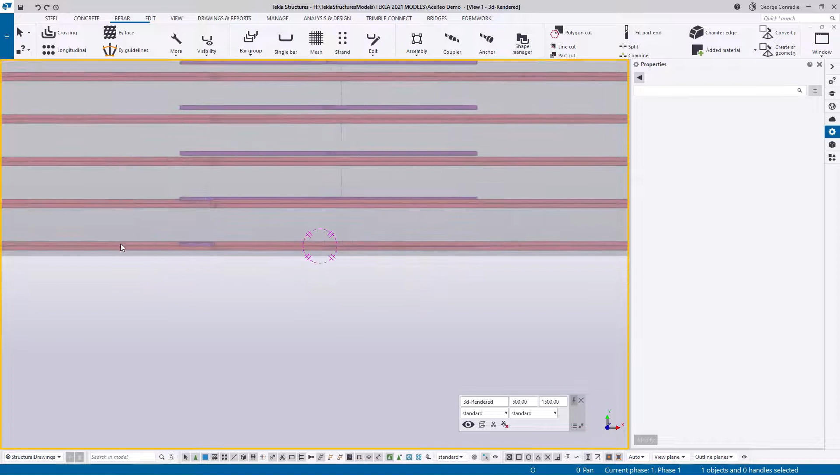So if we pick this bar, first thing is let's fix up the spacing. I think that's the easiest thing to do. So if I click on our original bars here, I just want to make sure that we actually didn't implement the 50 there. So I'll do 50 here and 50 here, so it will give us a nice spacing.

So I'll do the same with the top. Just quickly introduce a 50 start and end cover, and then that gives us nice bars. And now what we can do is with the Z bars, we know that 50 works, so we need to jump 1, 2 of them. So 50 plus, it's 69, plus another one is 88 mils. So if we do 88 mils there, we get that one exactly.

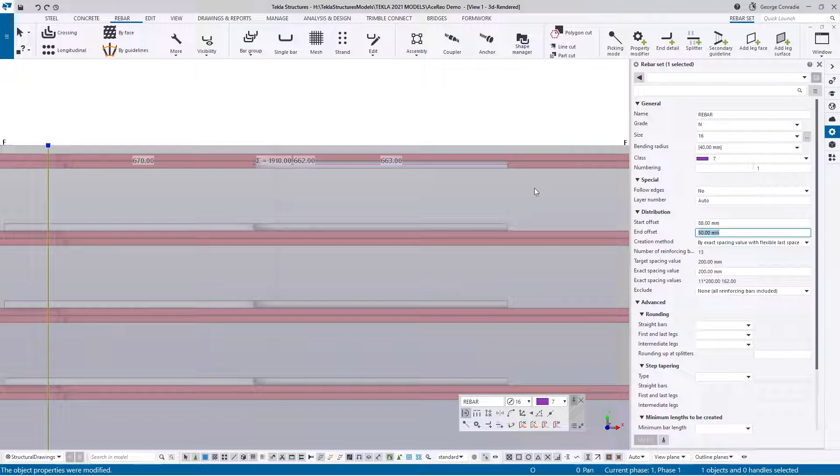And now to make it work spacing wise, we need to say give us an odd last space, modify. That fixes up the spacing. And then if we look at the last one, we just need to pull it up by 1. So it's 69. And that fixes up the Z bars exactly for us.

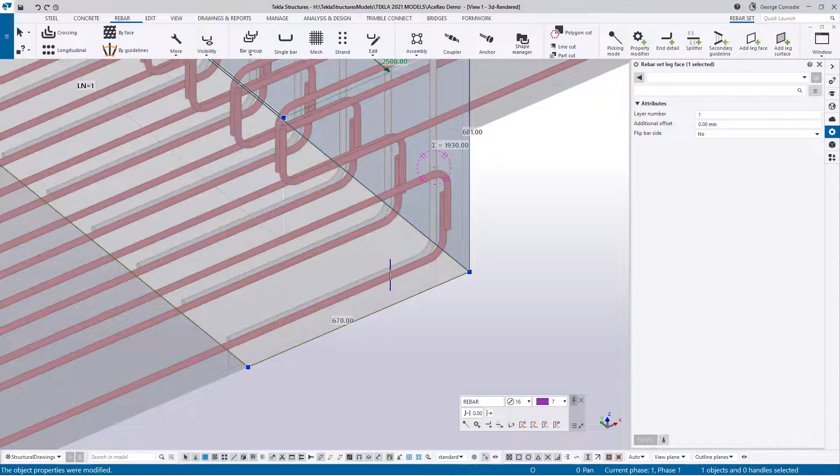Now, the only thing we need to do with this Z bar is to look at the leg offsets. So if we go leg faces, we can see that this, if I click on this leg, it's in layer 2 there. But also when I click on it, we can see layer 2 there. So we'll just push that back into layer 1 so it sort of ties up with that leg. On this face here, you can see also it's in face 2. So click on the face and we can push that back into face 1. So that ties it up nicely on the back.

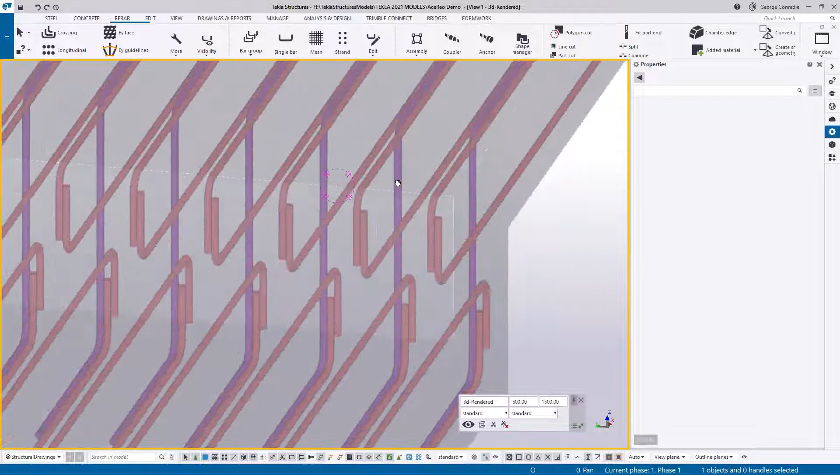And now on the top, you can also see that we've got a layer 2 here. So if we click on that one and force that into 1, that Z bar is now exactly in the right layer. It's tying with the right bars, right position. So the only thing that's left to do is just look at its leg dimensions. So we know the 700 is fixed, but we've got really funny dimensions here, like really weird.

So if we go end, we load our standards, we change our hook into a no hook, and we change our offset for a leg length, and we make our leg length 900 for instance. Then I can hover over this leg, that's forced 900, and I click over this leg, that's a forced 900. And we can already see it just from the values here in the magenta little dimension line. We can also just verify it by clicking on it and go inquire, and we can see it in the bending schedule 900 by 900 by 700.

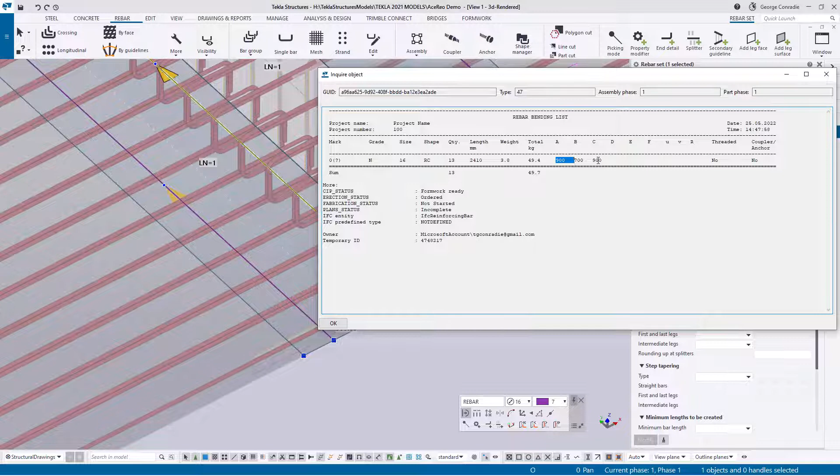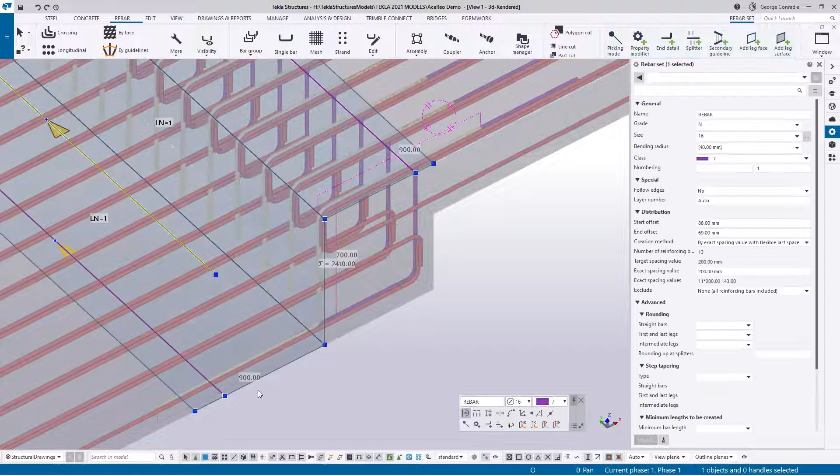And now to get the other one done, it's a simple process of clicking on this one, right click, and we can say copy special linear, and we copy it from this point to this point, copy, and that's 100% with the laps and everything. So if we click on it, we can see we've got the 900 and 900, everything works. All we need to do is look at the spacing. So if I go Control P and I click on this bar, it's now in line with that one. So we need to move it one more. So 88 plus another 19 mils is 107 mils.

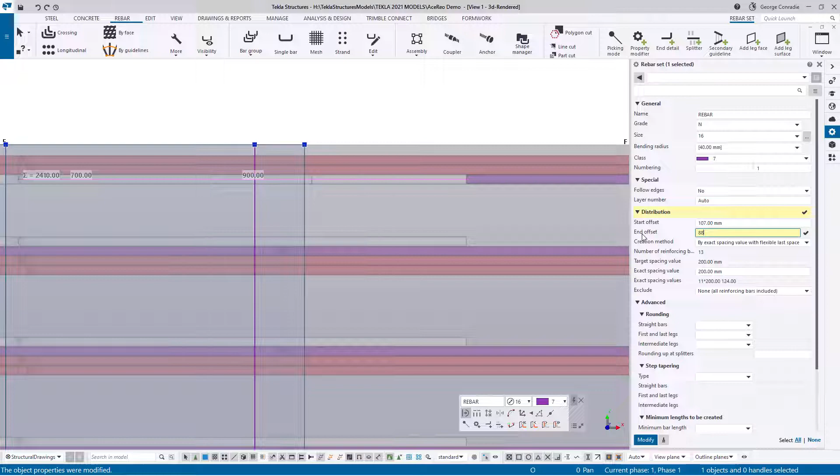And because we have the spacing set to a flexible last, it's already worked out all the spacing for us correctly. All we need to do is adjust the end here. So it's overlapping with that one. So we need to introduce another 19 millimeters there. And if we do that, it pushes it one back, and we can see how beautiful those now all line up perfectly without any clashes.

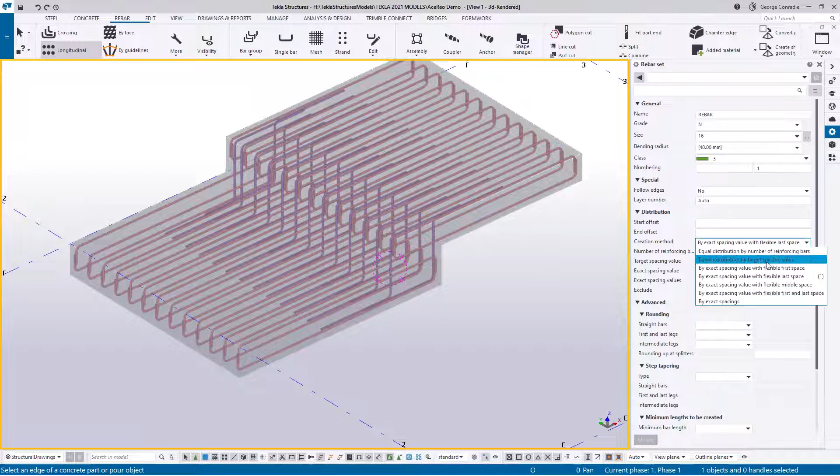And now all that's left to do on this one is to go longitudinal again. We pick our 16s, we will make it green, and we'll get rid of the offsets, and we'll say the distribution is going to be a target of 300, and that's it. And then when we click this section, we can say we want a top or bottom and top, create, and then click on this one and say top and bottom, create, and that creates all the distribution steel for us.

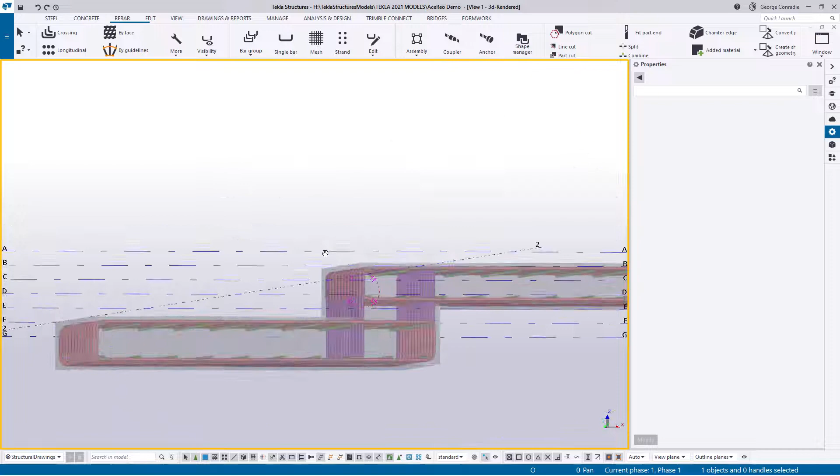Now if we look at that, we can see how well that's worked out for us. We have our Z bars exactly where we want them, no clashes, and we've got our distribution steel exactly where we want them, no clashes. So that's a pretty good way to detail a slab. Now I know, this is a very small slab, but it's no different. Once you've done that, you can copy bars around the slab and very quickly finish the whole slab.

I think, in terms of slabs, fortunately there are components that do specific things, but the rule is there's always one that can't help you and you have to do it manually. So I hope these methods that I show you help you to solve your manual issues when you start reinforcing with rebar sets.